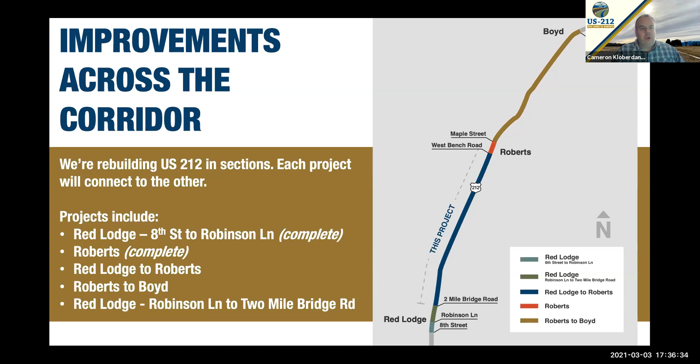So we are talking about the US 212 Red Lodge to Roberts project. Right now we have a set of plans that we have developed, and we currently are reaching out—well, we already have reached out to all the adjacent landowners and are starting conversations with them over the right of way that we need to build these plans. That's where we're at right now.

We envision this process taking another year, could be delayed out to 2 years, depending on how these conversations go. And we've also run into some headwinds of not being able to meet with everyone like we would normally do. So that's also added a little bit of a challenge as well.

But hopefully we'll be able to work through all of those challenges and have a design ready to build as early as 2023. And I say as early as because that's where our funding comes into play, and that's kind of a little bit of uncertainty there. We hopefully will be able to go in 2023, but that will depend on our federal funding and how much we've been allotted, and also how much projects have been costing to build, and also mix in a little bit of different priorities there as well. So that's kind of where we're at right now and where we hope to be shortly.

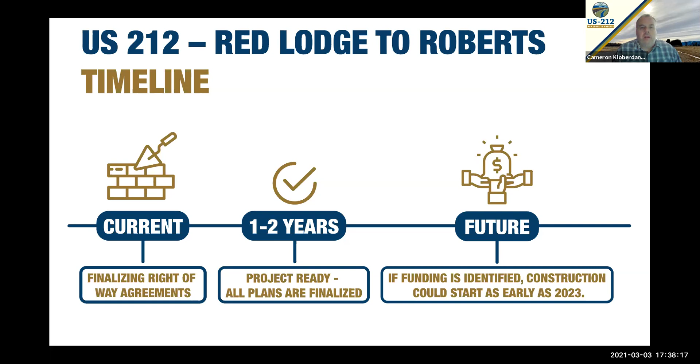Yeah, thanks, Cameron. So a lot of people say, why this project? Why do we need to do anything now? Well, this is part of a larger project, an entire corridor study that identified deficiencies in the corridor, of which I want to mention a handful of those to all you folks.

So obviously there's traffic growth along this highway with increases in tourism. Yellowstone Park is seeing record years year after year. Interest is growing in the community of Red Lodge and Roberts and the surrounding area, with the motorcycle rallies in Red Lodge and the parades and the rodeo and all that kind of stuff that draws a lot of people to and from here.

So with that increase in traffic comes, believe it or not, some form of congestion in the sense that passing opportunities for folks are somewhat limited along through here, and people's impatience grows. So one of the needs here has been to increase the capacity on this facility to provide some more passing. So anyways, that's how we address the traffic element of this.

The highway really hasn't been improved substantially since 2002. And with any facility, any kind of infrastructure, over time it degrades. And with a highway facility, the more traffic that's on there and pounds on the surface, the more it needs to be addressed and eventually reconstructed, as is the case here. We will be tearing up the existing roadway and replacing the surfacing, doing a variety of improvements, which I'll touch on.

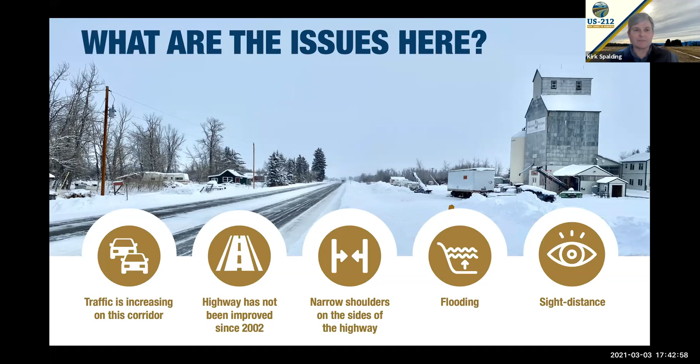So improving sight distance by opening up the sides of the road, building these ditches, and improving the alignment of driveway approaches so they're perpendicular to the road. There's quite a few things out here that need to be addressed in that sense, and improving sight distance will go a long way toward improving the safety of this facility. If you could advance to the next slide.

So what are we doing to improve these deficiencies that have been identified? Well, the biggest one is that we're adding passing lanes. We go through a pretty arduous process to determine where passing lanes are appropriate, and with this project we're adding approximately 3.9 miles of passing lanes combined between northbound and southbound.

That's about 2.2 miles of northbound passing lanes, around reference post 72.5 to about 74.5, and about 1.7 miles of southbound passing lanes from around mile post 79.5 to 81.5. I'll show you more detail on that a little later.

The passing lanes will be big because, in terms of highway safety, that's one of the biggest elements we have to address: people making poor judgment decisions, getting impatient, and making bad decisions on when to pass. Some of it may not be their fault if they start the passing movement without enough acceleration and suddenly a car pops up in their view.

So we're aiming to improve all of those conditions by flattening the grades a little bit in places and improving sight distance so you can see the headlights of an oncoming vehicle in some locations. We are going to improve nearly 10 miles of this roadway.

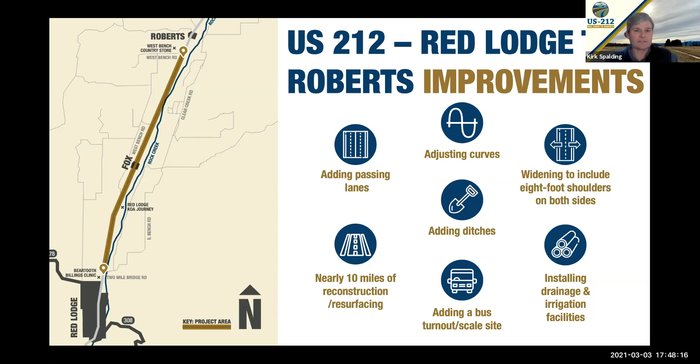And with that, I'd like to pass it off to Rod. Or actually, sorry, I still have one more slide.

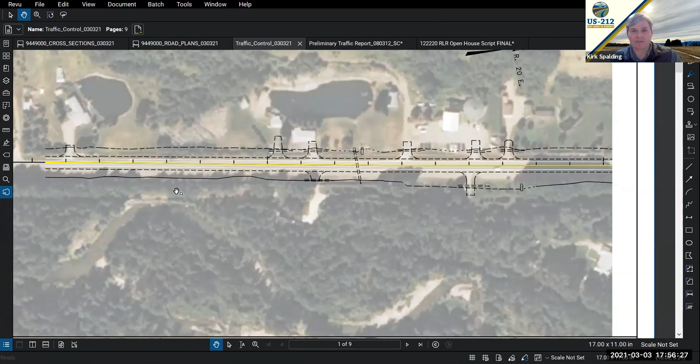I might follow up on that. This exhibit shows 2 Mile Bridge Road, with the hospital in Red Lodge, and north is to the right. These outer boundaries are the proposed construction limits, and MDT will be securing right-of-way slightly farther than that in most cases. So what you'd end up with is vegetation cleared within those limits.

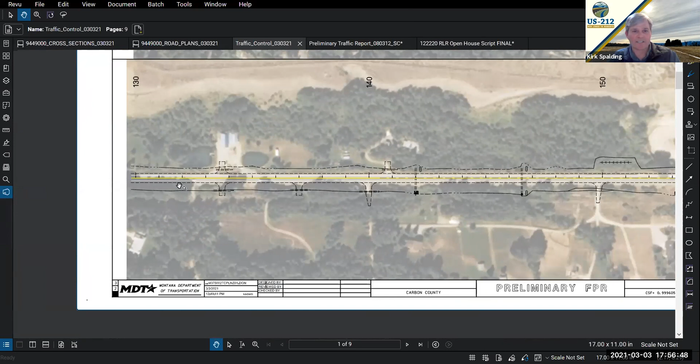Down by the ponds, we're going to need to clear out that vegetation along through here. I know there's that funnel by the gravel pit that's very narrow - again, that'll be knocked out. And this feature next to the gravel pit is a containment berm. There's a history of this hillside coming down and sliding against the highway, so we'll be putting in a gravity system, a big pile of rock, so that if something comes down, it doesn't hit the highway.

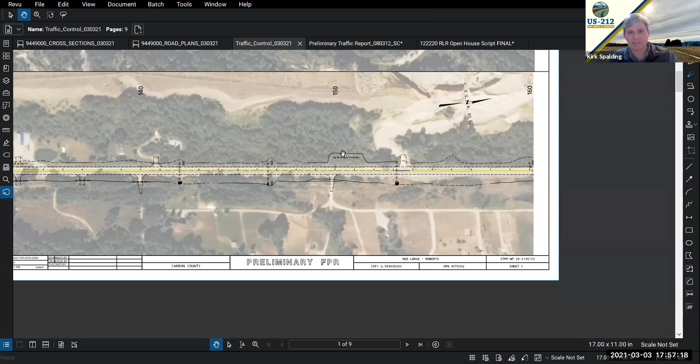As you look along the project, you can see we're pulling out a lot of the vegetation in those dense areas. And even where it's not that dense, the tall grass that occupies much of this will become ditches for roadside drainage, so the height element of that vegetation will kind of go away.

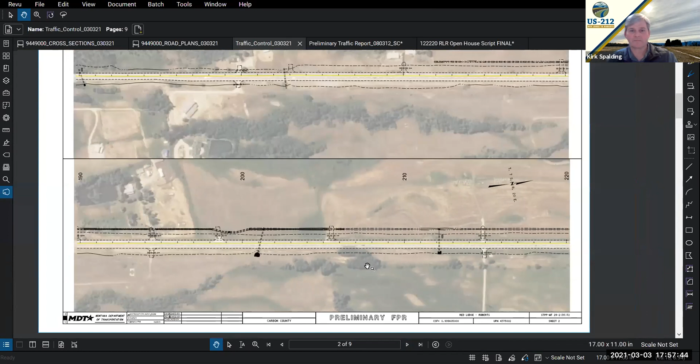Thank you, Kirk. While you have those plans up, it might be helpful to point out, to Grant's other question, where the rumble strips will be placed.

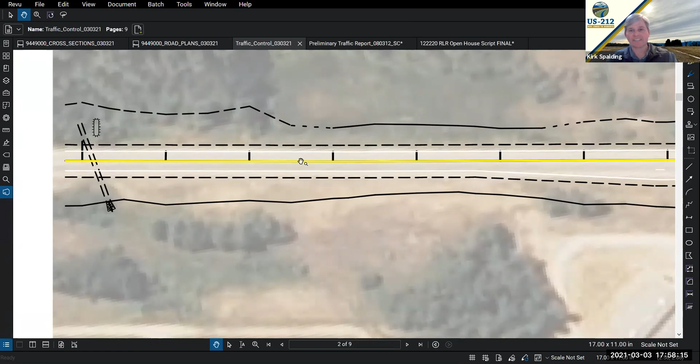Sure. Rumble strips are now a requirement on Montana state highways. Rumble strips go on the fog line, right here under my hand. In no-passing zones and partial passing zones, we implement rumble strips in the center. There are some locations with opposing passing, so in those locations you don't have center line rumble strips, but we'll always have those shoulder rumble strips.

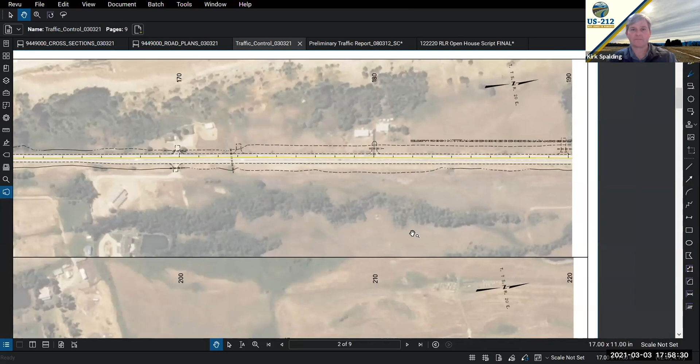Thanks, Kirk. This display is really helpful because we're getting a lot of questions about the project area. Erica is asking next if you could explain exactly where the fence will sit in the cross section of the map.

Fencing gets placed on the proposed right-of-way line - I don't have the proposed right-of-way on with this scenario, but let's look at an example where we have construction limits out here. Let's say the right-of-way line is right here - that's where you would see the fence located, on the proposed right-of-way line for the highway. We try to set aside the highway facility from private property in that fashion. When negotiations occur between the department's personnel or the consultants they've chosen and the landowners, discussion on this type of fence occurs at that point.

We have wildlife-friendly fencing, with smooth wire on one or more strands so animals can go over or under. For people who have cattle, if they want 4 or 5 strand barbed wire, that's how that comes into play.

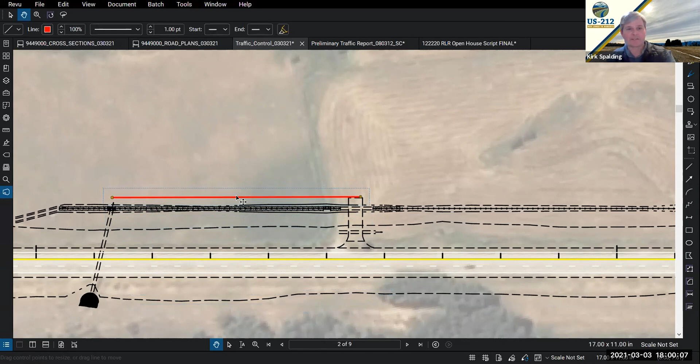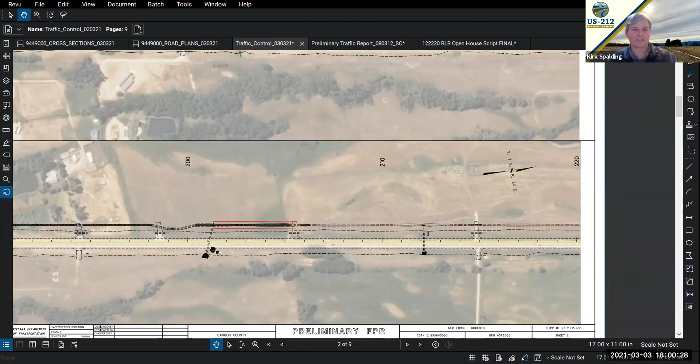In this case, the right-of-way would be somewhere in here, and then there's an easement that comes into play for the irrigation facility. So what you're seeing here is a relocated irrigation ditch that would be put outside of the proposed right-of-way, in its own little easement so operators have the ability to maintain the ditch. These are crossing culverts, both for irrigation facilities and drainage, when you see something like that going across the road.

It's important to keep in mind that it's variable depending on the width of the roadway, the side slopes of the roadway, and what other roadway features there are. So that's partly why we can't give a set distance, because it changes all throughout the project.

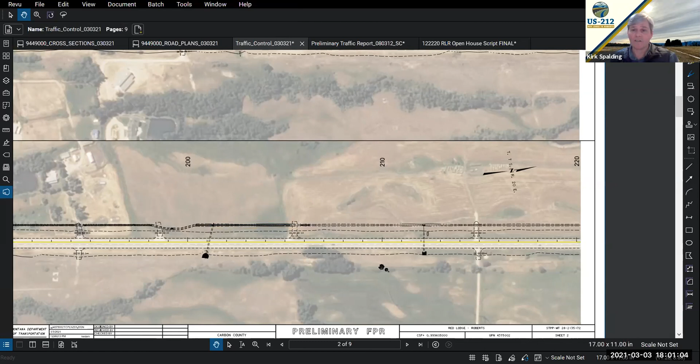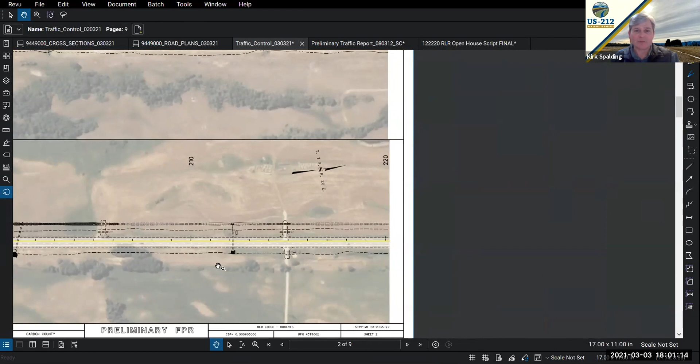In some cases we have private drain fields we need to avoid, or private wells or monitoring wells and things like that. That's when you'll see some interesting things where we dog-leg or kick out right-of-way, or kick in right-of-way, or construction limits do something a little strange in a location. Hopefully that gives you guys a sense of what's happening out here.

Thank you, Kirk. And I did send a message, but if you do have any additional questions, Erica, please feel free to follow up. She said the fence goes on the right-of-way line and then another 25 feet of easement past that.

Is that correct, Kirk? It could be, whether the easement ends up being that width or something different. The irrigation easements are typically fixed at some increment of width based on the size of the facility. Some irrigation ditches are smaller than others, and really what we're trying to do is give some room on each side of the actual ditch for an excavator or a backhoe or somebody's one-ton pickup to run back and forth along the sides of it.

Perfect, thank you. One last follow-up question on that same line: when the stakes are out, when the survey crews are out there, Erica's question is if that's where the fencing will likely go.

Rod, I don't know if they specifically stake the right-of-way during construction. I know they're going to stake the construction permit areas, but can you respond to that — if come construction, the stakes they see out there will be labeling the right-of-way?

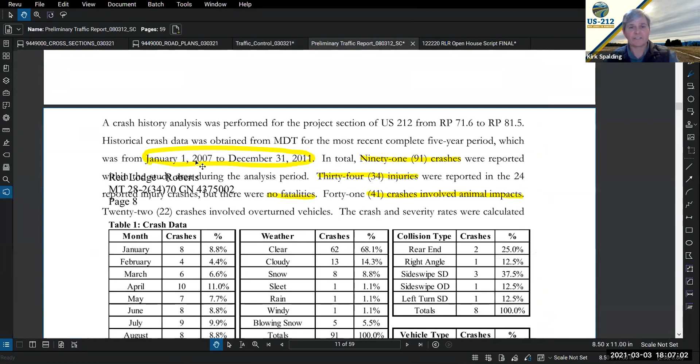During the process of project development, we go through and evaluate very carefully the accidents, the clusters, the locations, the causes of those accidents, and we try to identify if there are any cluster locations that pop out as being an area where we need to take a more careful look.

So this is a snapshot of what we had, a 5-year period between 2007 and 2011. There were 91 crashes, 34 of those caused injuries. And the interesting one, which we always keep our eye on, is the animal impacts. Not half, but not far off a half, involved animal collisions. And we all know, as we drive this frequently, the white-tailed deer is pretty obnoxious out here.

There's been quite a few bear collisions as well. So we're hoping that with the opening up of this facility, widening and improving the sight distance, and removing the vegetation, we will see a noticeable improvement in this. Now obviously, the deer that are getting a running start at crossing the highway, we really aren't going to see a big change in the mortality of those animals, unfortunately. But those that are kind of staged along the road and playing chicken with you, you'll hopefully at least have the opportunity to slow down and assess the situation before proceeding forward.

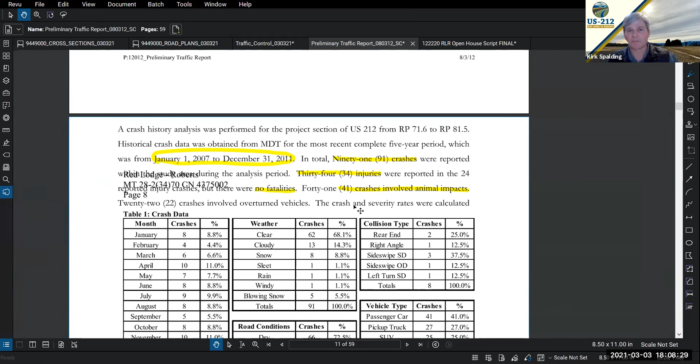Next, we had this question earlier today. There are a few folks asking about what the access might look like for the KOA, so if we could maybe revisit that this evening. Carrie is asking if we have any plans for a turn lane accessing the KOA. So we don't have intentions for putting a turn lane in there. Now, I know this is something being discussed with the KOA a little bit during the right-of-way process, and I've heard there's consideration or at least discussion ongoing about trying to get another access onto Highway 212. But again, based on the volume thresholds, it didn't warrant turn lane provision there.

So if they want more information obtained on this, or want to share some information with us to help us better understand the peak flows and whatnot, when we might want to get some people out there and take a peek at it, we'd be happy to entertain that. But again, based on volume thresholds, it doesn't quite hit it, even with the slow RV-pulling-boat scenarios or even larger Greyhound bus style. It hasn't shown itself to us. So if there's more data we should consider, we'd be happy to take a look at that.

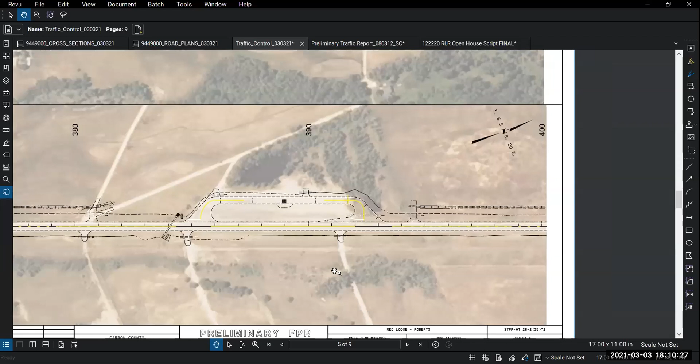Thanks, Kirk. And that actually segues really well into a question we have from Paula. She's sharing that she's a school bus driver for the Red Lodge school system, and her route is the east bench from 2 Mile Bridge to Fox. She's sharing that when she comes onto Highway 212 from the 2 Mile Bridge Road, she has some safety concerns with the speed of oncoming traffic. Her question is that she's heard there may be a roundabout being installed at that junction, so she's curious if that's happening, and shares that it might be advantageous for reducing speeds.

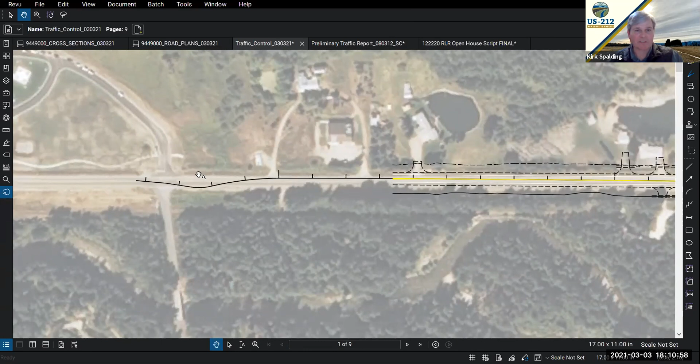So yeah, very loaded question. The roundabout is proposed with the adjacent project, the one Cameron was referring to as Robinson Lane to 2 Mile Bridge Road. It would be located here with that project, and it is that transition element from the high-speed environment to the north to the lower-speed environment.

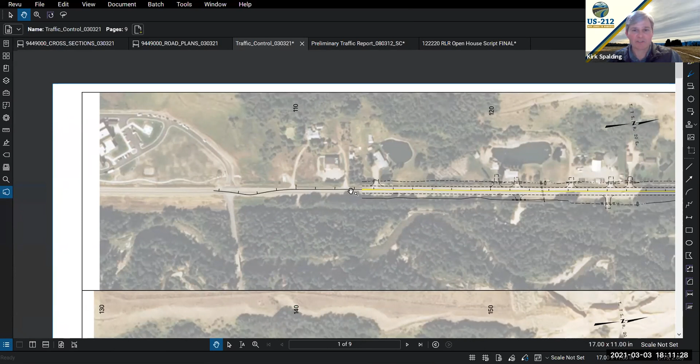The community has had concerns, since I've been involved clear back in 2009, with the speeds through this area. This predated the hospital by quite a bit, but there was concern that people would just continue on zooming through. The solution we presented to the mayor and city council was that it requires enforcement to make a change at a place like this until we can get this thing in here.

So now, yes, you're right. We will have north or southbound vehicles having to slow down and negotiate this roundabout at 20 to 25 miles per hour tops, and then come out of the other side into a lower speed zone. So we do have a speed reduction to 45 that starts somewhere in here, proposed along with this. And of course, there's been a lot of speed study done in here. I did mention the speed study recommended no change in this area, which continued actually quite a ways to the north.

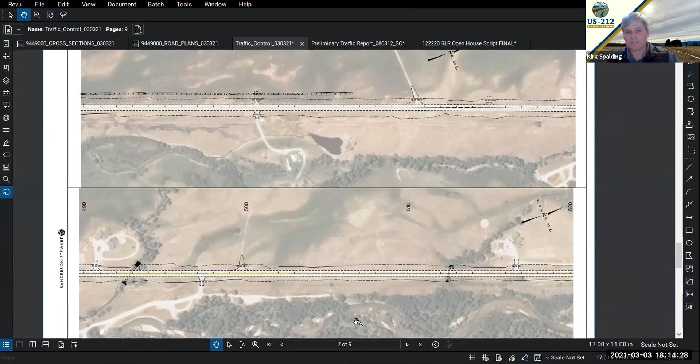So where we've put approaches is where we would like to see them. During the negotiation process, that can come back to us with suggested changes or questions about relocating. But we try to put these approaches, say there's a property line here and a property to the north and south, on the common lot line. Some of these have been slightly adjusted, some noticeably adjusted, and those are the kind of things that MDT and its negotiators take to the public individually, and then we see if it works for them functionally. We've had a lot of conversations with landowners over the years as well.

I think we could just speak to that: public roads are wider than private approaches. I don't know, Kirk, if you have that width off the top of your head, but they're much wider. And roads that access multiple properties are also wider than some private approaches as well.

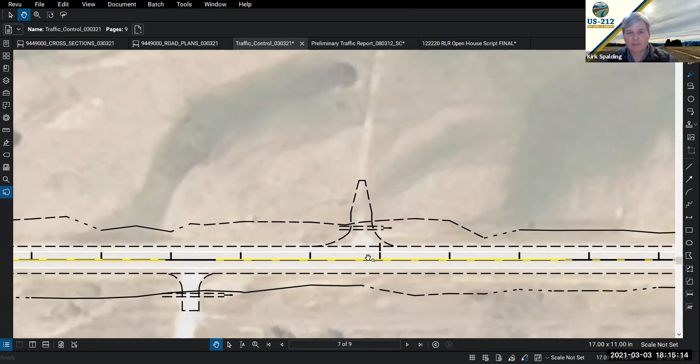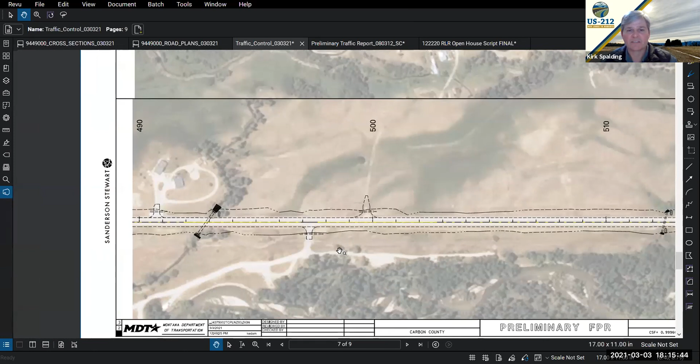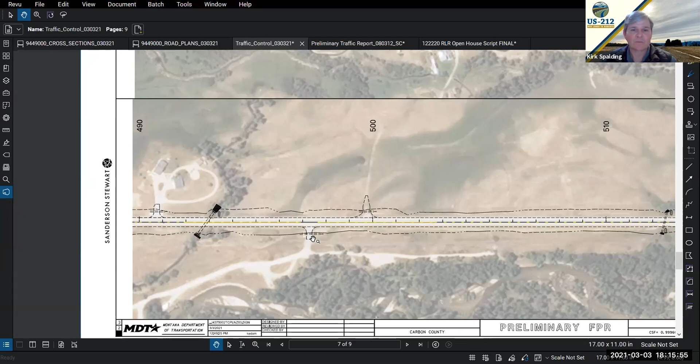So we start with a 24-foot standard approach width, and this one down here is narrower, which is something that's come back to us. When it comes to commercial property access, ingress and egress, depending on what needs to get in there, we look at the design vehicles - maybe they have a large service truck or a carrier truck from the interstate. We may have to widen these based on the information and feedback we get from them. We don't purposely put in large approaches because they don't get used for their full width in most cases, and it's expensive and a maintenance item. So we start with the standard 24-foot approach, which allows for essentially 12 feet in each direction, usually more than adequate for most approaches along a rural highway.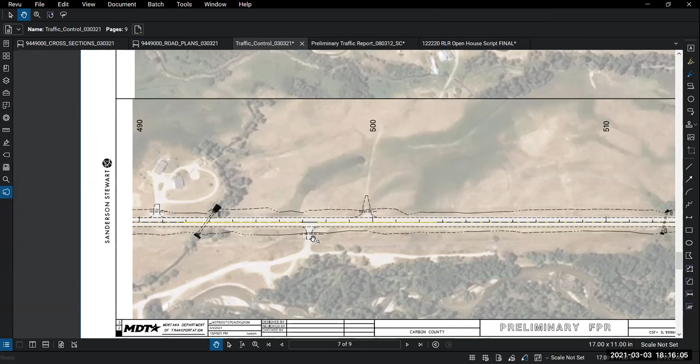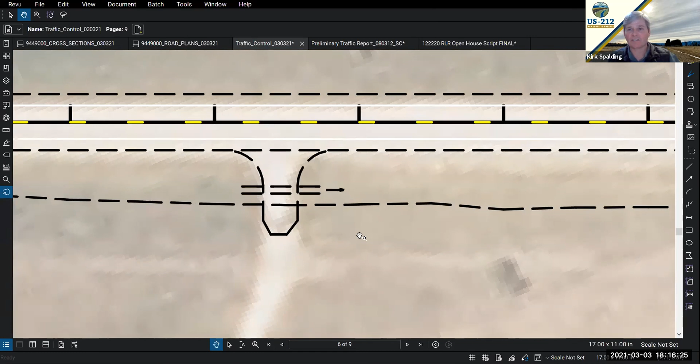And this will be a significant increase to most of the approach widths that are out there currently as well. In fact, it feels kind of funny sometimes for us to put in a 24-foot approach to somebody's 8-foot driveway. Often you'll see this - we put in this approach to this width and taper down to that, so at least it gives them a nice large facility to pull on and off the roadway and feel safe, and then we taper down to their existing widths.

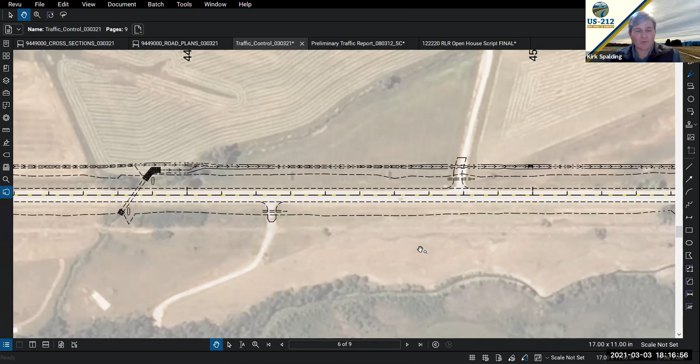Well, I guess in terms of significant, that's a fairly qualitative statement. I can say we have anywhere from 4 to 16 feet of alignment shift, depending on where you are. At the south end of the project, we have water weeping out of the hillside to the west of the highway, and we really don't want to dig into that hillside and open up an artesian well. We get enough moisture as it stands.

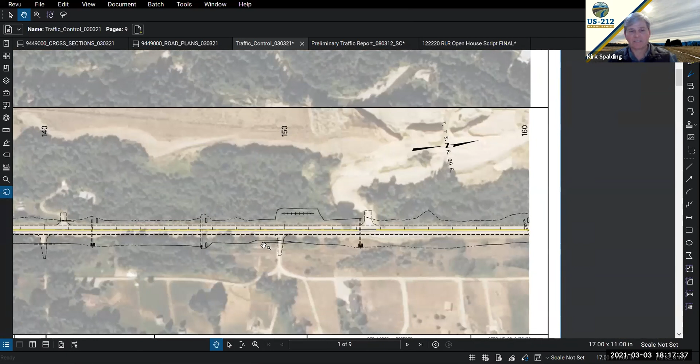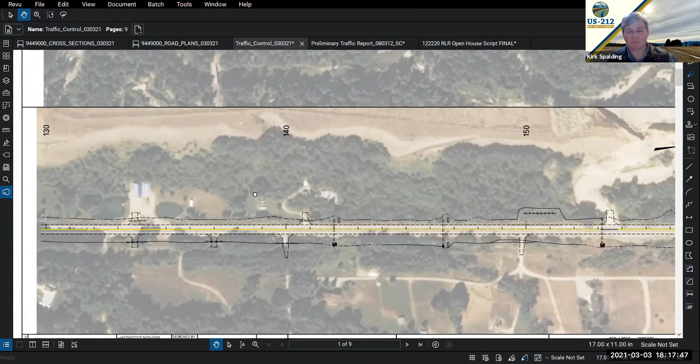So we've largely looked at holding the west edge of the roadway where it is today, and in that first mile, we shifted to the east to minimize impacts to water features. There are private ponds along here, and we don't want to get into the berms of those ponds either. So there's an alignment shift, and this is by far the biggest one, in that first mile.

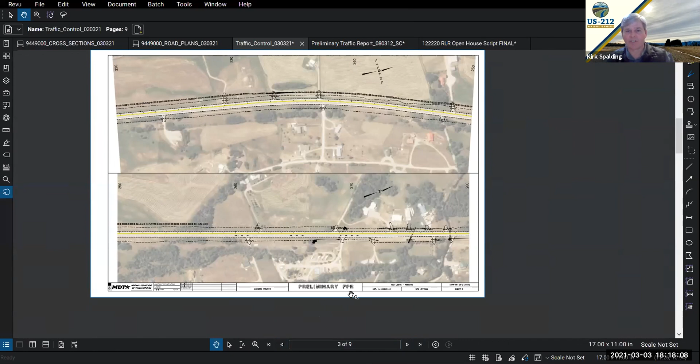When we get up to the community of Fox, we had an alignment shift of around 4 feet. The reason for that was because the majority of the residences were on the west side, and we had the opportunity to move it to the east because of the grain bin area. So we made a shift there.

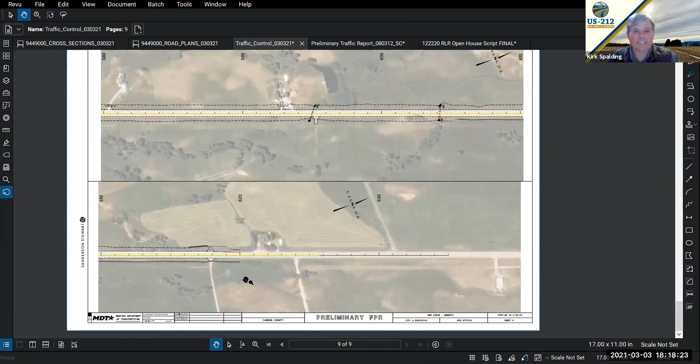At the very north end, where this project connects into the other project, it's difficult to see here, but there's actually an alignment shift to the east. That was because the landowners on the west side, all owned by one family, had an existing right-of-way limit that was smaller than what was available on the east side. So following the existing center line, we were taking an unequal portion of right-of-way from the west side of the road. We shifted it 12 feet to the east for some distance, probably close to a mile, before going back again to match the center line of the existing roadway.

The other thing that comes into play is when we have the passing lane construction and some of that extra asphalt, we have to weave where we want the center line a little bit. But generally speaking, no major alignment shifts going through houses, private property, or structures.